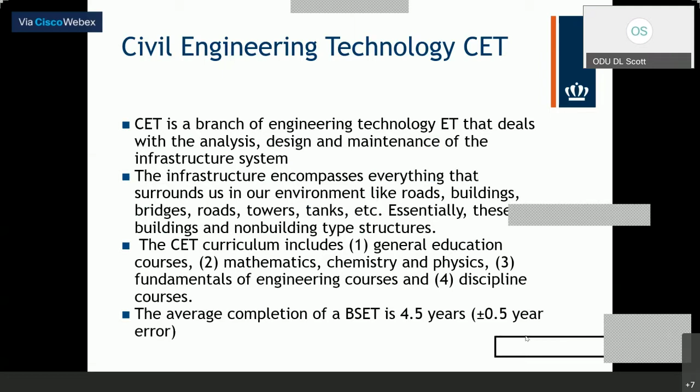Hey Professor, could you—I see some gray boxes over the slide. It looks like you have your WebEx open over the slide. Is there a way to move those? Okay, okay, thank you, thank you.

I think if you listened to the talk last Friday with Professor Lufke, you were able to hear information about what engineering technology is. For those who were not in that talk, I also prepared something similar. Here I'm going to focus specifically on engineering technology, which is an education based on project-based learning.

You are able to work on a project and at the same time start applying some of the principles and fundamentals needed to solve that problem and obtain some form of an outcome. That is a way of learning in a system—not necessarily just doing mathematical studies and solving equations, but developing some sort of a project.

It's a practice-oriented instruction or curriculum. We are very focused on you being able to succeed in practice, so that what you learn here has a very close relationship with the work you will do in a civil engineering office in practice. That's how the entire curriculum is structured.

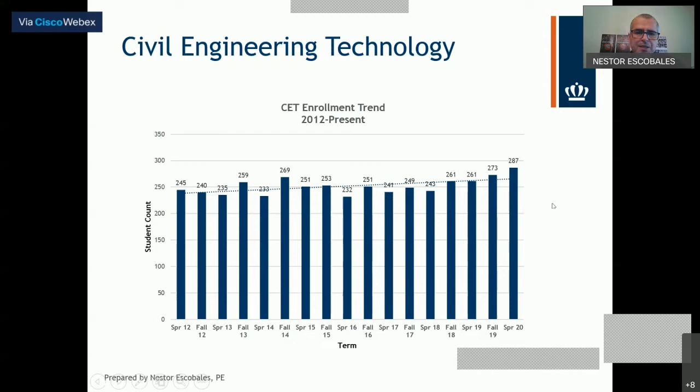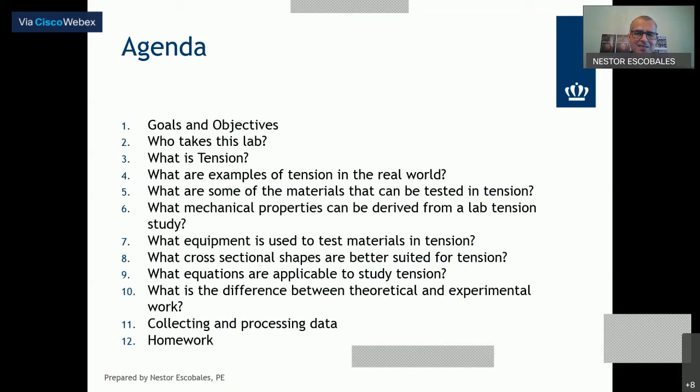At the end of this lab, attendees will be able to understand concepts related to tension of metals, study mechanical properties of metals in tension, and research online. I don't want you to limit your understanding to what is shown here—you can research and expand, looking for other avenues of growth in terms of learning.

So I want you to do research, apply the concepts learned here to collect and process data, and develop a graph that shows the behavior of metals in tension.

When I say develop a graph, we'll be going into the programming aspect, and you can do that in different ways. One simple way is using Excel, which allows you to store and process data depending on the equations you use. When you plot a graph, you can see how the material reacts to the application of load—that's very important for us.

Lastly, we interpret results and derive conclusions. Once we see the graphs, we can start thinking about whether this material may not be the best for the application compared to another material. In the laboratory today we will test three different materials, and you'll see how they behave and which one would be best suited.

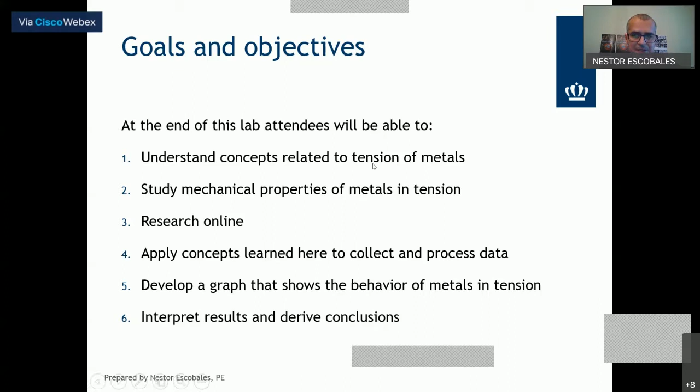So who takes this laboratory? Essentially civil engineering technology students, mechanical engineering technology students—on the science and theoretical side they have what they call a materials laboratory, similar to ours. But this is civil engineering technology oriented, in the engineering technology department. So those are the types of students.

So what is tension? I want you to think about tension from a structural standpoint. You may hear the word tension used when referring to stress—it's somewhat related, but here we want to think about it structurally.

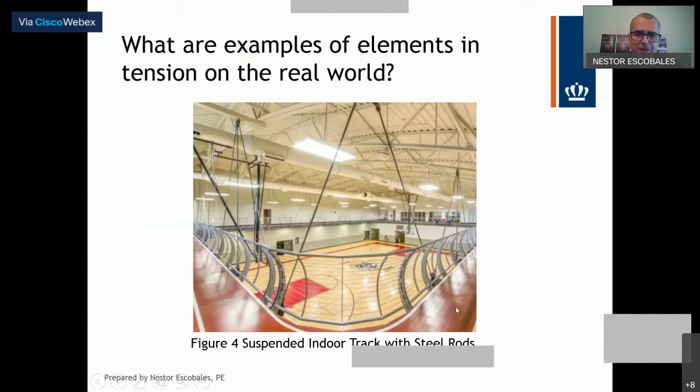So what are examples where we can see tension elements used in the real world? For instance, this is a gymnasium with a basketball court in the center, and there is an indoor suspended track. People run around on that track, completing laps that could be a good 200 meters, perhaps.

Now, the floor beams are attached to the wall, and then they cantilever inwards, and they are held by cables. You see these cables in here? Those are steel rods, and we have several of them around that perimeter. If you look closely, you can see those cables suspended in a pattern. So those are cables in tension, and those are steel rods.

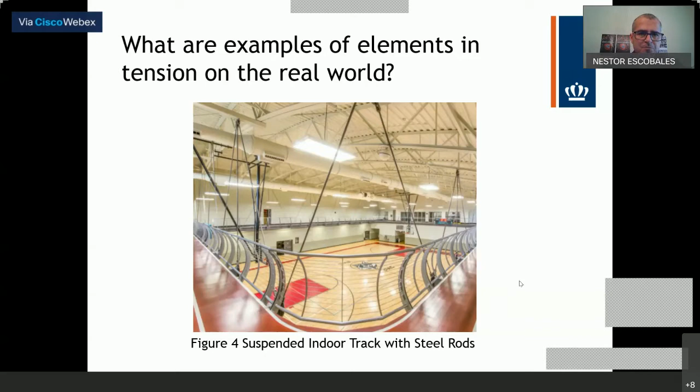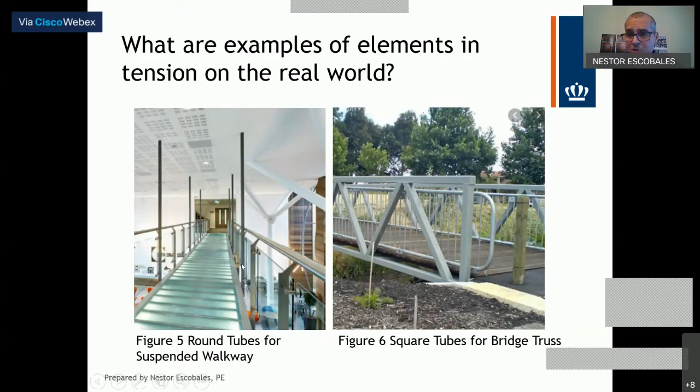So what are some of the materials used for tension type applications? I'm specifically looking at the materials, not the cross-section - I am interested in the materials. So I have alloy steel, aluminum, brass, bronze, carbon steel, cast iron, stainless steel, fiberglass. I can even include plastics. In some cases, that may be the material of choice. It all depends on the application that we may have.

One of the tests that I have today for you is using cast iron. When you plot the graph of stress versus strain, you're going to see how aluminum and carbon steel behave differently versus the cast iron. Those are things that will allow you as an engineer to make decisions as to what choice you may go with in terms of materials. So that is important.

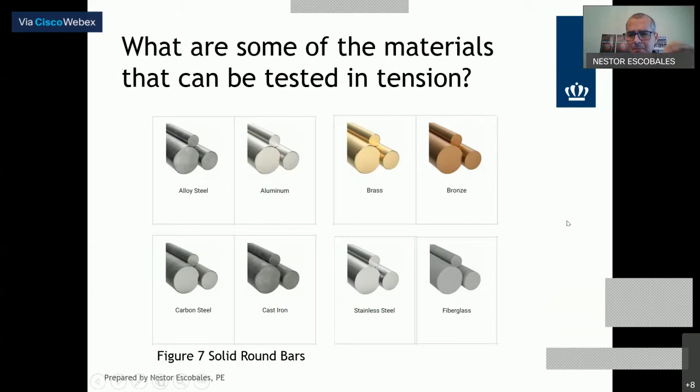What mechanical properties can be derived from a laboratory or lab tension study? So we have the modulus of elasticity, which can be interpreted as the value at which we apply a load, and if we remove it, the material goes back to the original position without any deformation. The modulus of elasticity essentially tells us the extent of that material as far as loading it, and what deformation, how far it can go, such that if I remove that load, it goes back to zero. We can derive that from a stress-strain curve - that's the modulus of elasticity.

Poisson's ratio is a ratio of the lateral deformation divided by the axial deformation, and it essentially allows us to know whether a material is unable to resist any compression or a material that is literally incompressible. Poisson's ratio ranges from 0 to 0.5, being 0 materials that do not resist any type of deformation, and 0.5 materials that are nearly incompressible, where there's no deformation whatsoever.

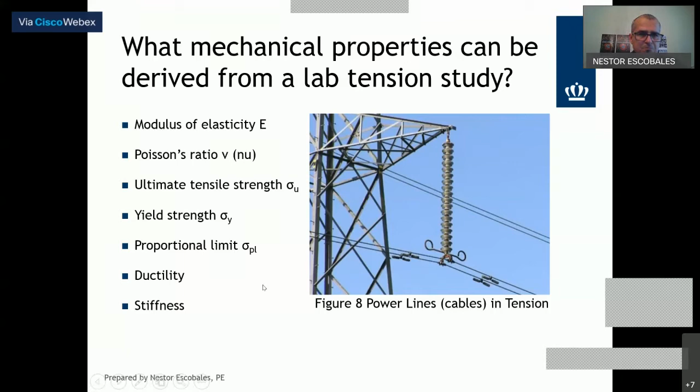What equipment is used to test materials in tension? And here we have Tinius Olsen equipment. Most, if not all, of the equipment in the material testing laboratory has been purchased directly from Tinius Olsen. And these are compact pieces of equipment that are very technically oriented, with a lot of technology attached to them.

These are hydraulics, and we can do tension in this area. We can do compression in this area. This is the controller, which is the system used to operate the equipment. The left side has a middle cross arm, which moves up and down. For tension, specimens are placed between the top and the middle - so this is the tension. For compression, specimens are placed between the base and the middle cross arm, on this platform, the base platform.

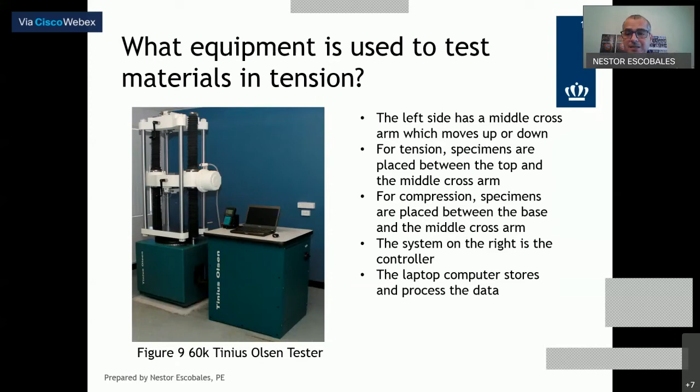The system on the right is the controller, which is essentially led by the computer, the CPU. The laptop computer stores and processes the data. Essentially, in our classes, we collect the data, we give it to the students, and we let the students develop the programs to obtain the graphs and learn what the behavior is.

What cross-sectional shapes are better suited for tension? So now we can talk about the shape, what section type we are using, regardless of the material. Here we have a great variety of cross-sectional elements that can work in tension. The selection is based on the problem at hand. The connection details are very important and shall be studied carefully.

So here we can see angles, we can see bars. This is a hexagon. We've got this would be a rebar, a hollow pipe, hollow tubes, plates of different thicknesses, and in fact you can actually weld two or more of those elements and create a composite section. They can also be made with different other materials.

So I am just showing in here the cross-sectional shape. When I'm talking about the cross-sectional shape, for instance, this is a round bar, this would be a square bar essentially, this is a square hollow tube, a circular pipe, and this is a rectangular plate that will be the cross-section of an angle. So the cross-sectional area is the area that you see at the end.

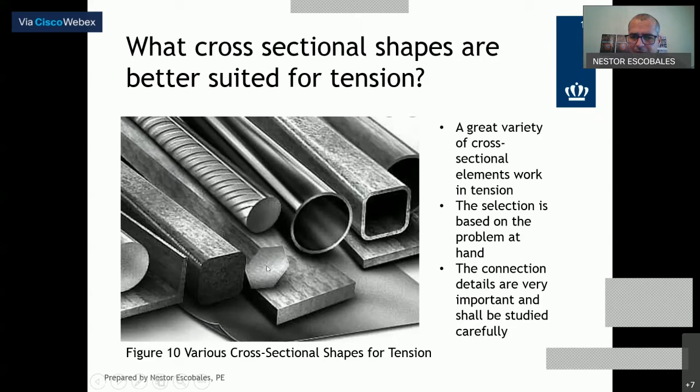So what is the mathematics required to study tension? Again, from the engineering technology standpoint, I'm providing the equations, not necessarily deriving them. In the strength of materials class, which is required for the laboratory, and in our statics class, we derive some of those equations, so you will see that aspect as well. But the importance of instruction lies on the correct use and application of the equations, as opposed to uniquely the derivations.

So we have tensile stress, tensile strain, and that's essentially deformation. Poisson's ratio, nu, that's a Greek letter. Tensile stress, that's in the elastic sense only. Axial deformation, delta. Modulus of elasticity obtained experimentally using the stress-strain curve, and these are values of stress, which is the y-axis of the graph, and values of strain, which is the x-axis of the graph.

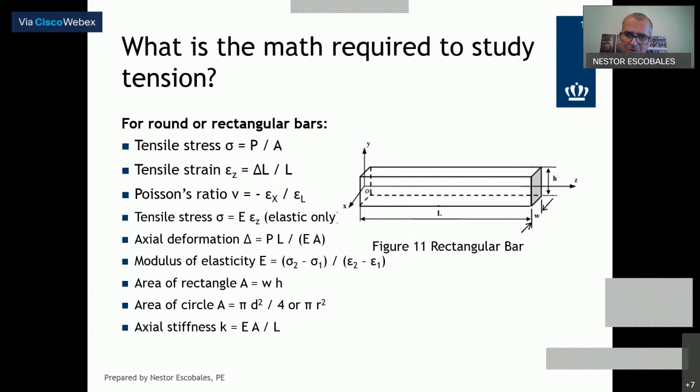The units of axial stiffness are force divided by length. This is a continuation of the equations, and now we can see the variables and the units. It's very important that we attach units to all of our calculations. Diameter in inches, radius of the circle in inches - that's the diameter of a circle, that's the radius. The diameter can also be seen here. Axial stress in pounds per square inch. Axial strain is adimensional, but we write the equations as inch per inch for the units.

Axial deformation, that's the amount that the element is stretched. Modulus of elasticity, E, that's pounds divided by inches squared. The force, T or P, in pounds, length in inches, area in square inches, width, height in inches, axial stiffness, K in pounds per inch, is force divided by length. So those are the different variables and the units associated with each one.

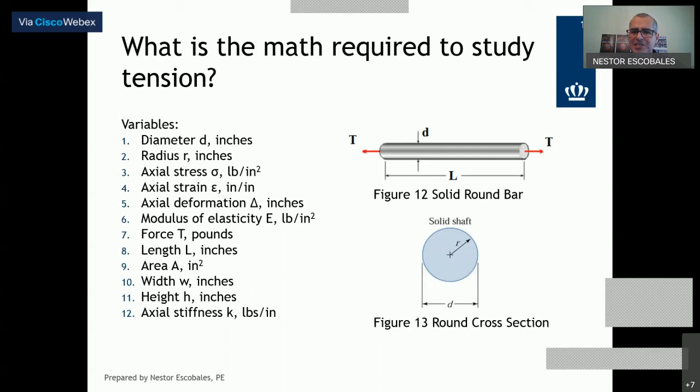So then now the question is, what is the difference between theoretical and experimental work? Theoretical work is pure mathematics - it's essentially the development of math to solve problems. You can do that in your classroom, in the office, at your bedroom desk. We can predict loads and deformations in members based on structural models and theoretical computations. We calculate analytically how much it will twist, what the torsional stress is, what the shear modulus is, what the ductility of the material is. Those are things that can be determined mathematically, theoretically speaking.

Whereas experimental work is in a laboratory setting with equipment. These are actual or specific results from specimens that are tested. Once you're testing something, you're applying a load, you can see how much it's stretching, how much it took before it broke - those are experimental type problems. Here we determine what the magnitude of mechanical properties are from a physical study of the specimen or specimens. Both the experimental and analytical models must be identical in order for things to correlate well. Those are the two types of things that we ask the students to do in our class, in our laboratory. The focus is on the experimental; the students have to do the theoretical and the prediction.

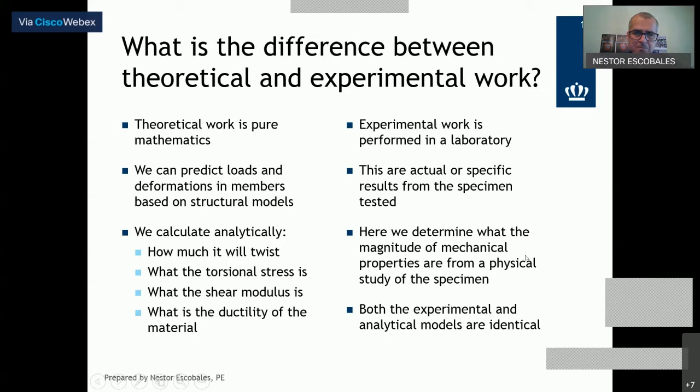So we collect and process data. That's an important aspect in a laboratory and is no different in an online laboratory. When doing experimental work, one of the most important tasks is to collect all appropriate data. That will be essential for you to run calculations. The experiment will give torque loading in pounds or tension force in pounds, angle of twists in degrees, etc. So the experiment will give you data.

The data will be provided at predetermined loading and intervals. So we apply load from 0 to 100 pounds, to 200 pounds, 300 pounds. At each one of those intervals, we record a deformation. That deformation at every interval is important for us to use in the calculations. Collecting this information correctly will be your primary goal. The data collected must be inserted in Excel in two columns: one column for the load, second column for the deformation, and that will be explained at the end.

Additional columns can be inserted to determine other mechanical properties. We call this a spreadsheet.

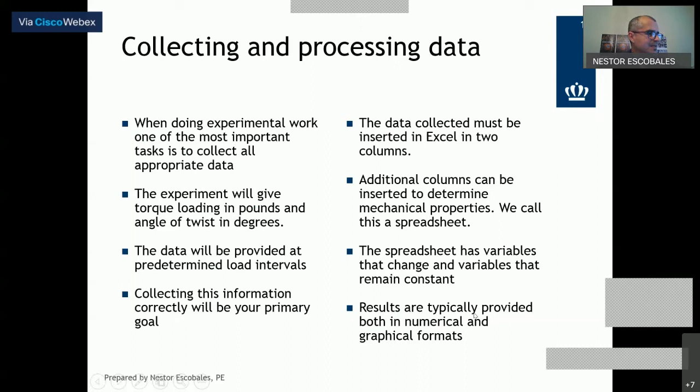Results are typically provided both in numerical and graphical formats. Numerically, it takes some time for you to become acquainted with the results and know whether things are working or not. When you see a graph, you can realize the true behavior of that material, and that is certainly more interesting.

So this is the homework we have today. I want you to reproduce in Excel format what is provided in figure 14. Open Excel and enter all of the information in cells, then add the units and provide the gauge length used. In this case, we're going to use a 2-inch gauge length for the study.

Thickness T of the material, width of the material, area, and then we have the readings. The readings are given to you during the test on Blackboard, which we will visit next. Then you're going to enter the load given in intervals and the elongation associated.

Then you're going to develop an equation in Excel. Enter equal, then develop the strain, and then develop the stress. Those equations are provided a few slides before. Collect the data, enter it in those green shaded portions, and continue down. I only wrote 8 rows here, but there are several more, that's why I wrote 'and so on.' Continue down.

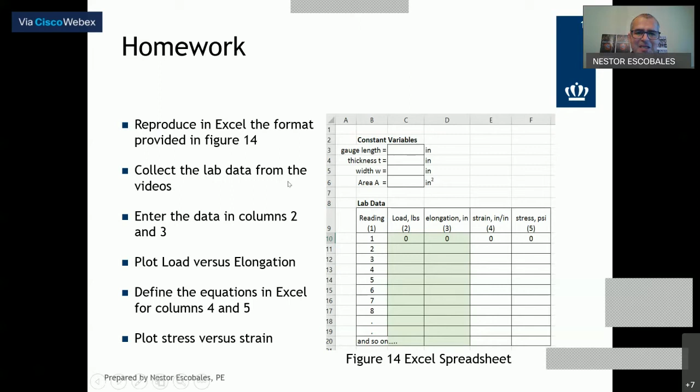Identify the axis well, identify the plots, give a title, add the units, prepare your Excel file, plot the graphs, and send me an email. Let's see who can rise to the challenge. In our class, I give more things to the students. I'm going to give you those two things to see how many people can actually do this problem.

So what to do next? Review the civil engineering technology intro presentation posted on Blackboard. You have access to Blackboard with the link I sent you this past week. Any questions, contact any of the links you saw in there, or contact me directly for any information. Research about Old Dominion University online programs.

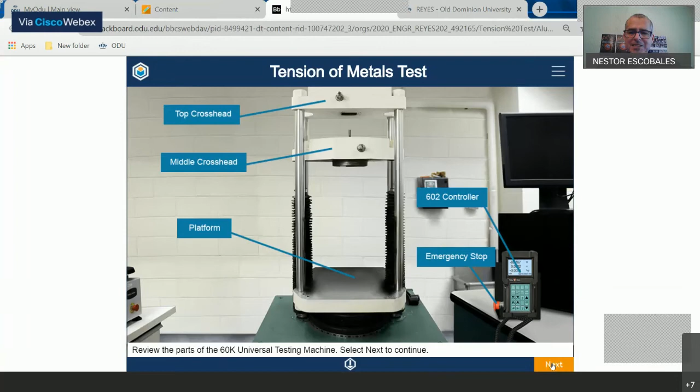What I want you to do is to read the information at the bottom - review the parts of the 60K universal testing machine, select next to continue. So then there is the next. I click on it, and then I go to the next page.

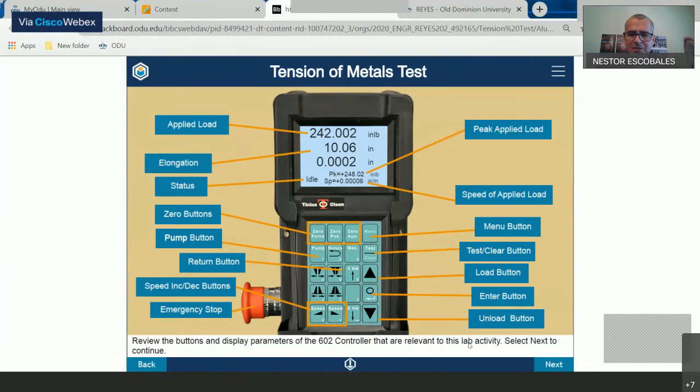I have applied load, elongation - look at all of those in there. So this is essentially a breakdown of the 602 controller. Read always at the bottom - review the buttons and display parameters of the 602 controller that are relevant to this lab. Select next to continue, and so forth.

Review the 3 metal specimens that we are going to test and other components used for this lab. Select the aluminum specimen to continue. So then I move to the first one here at the bottom, cast iron - no. Steel specimen at the middle - no. Aluminum specimen - yes. You can see that the cursor changed from this arrow to a little hand.

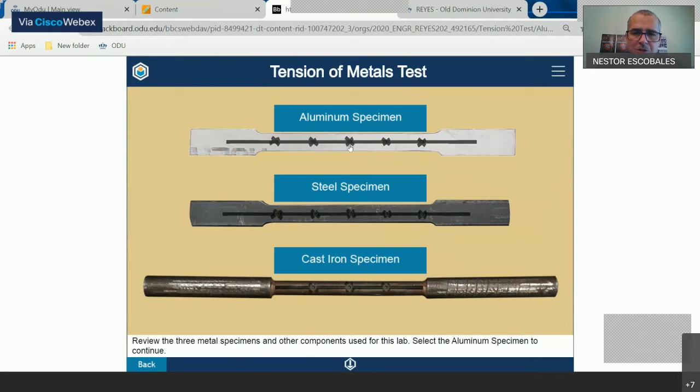So click on it, and now I can see that it has been installed. This little box shows that it is installed, and you can see it there, and it has been punch marked at 1 inch on center, which you will see in the previous activity. Then it says the aluminum specimen has been placed in the 60K universal testing machine. Now the 602 controller needs to be configured for the test. Select the 602 controller to continue.

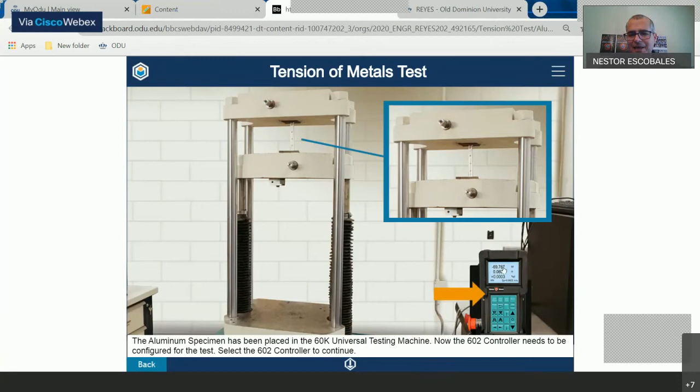So then it tells you to go here, and you see that when I go over it, it goes from the arrow to the little hand, and then I select that. I think I have a question, I believe.

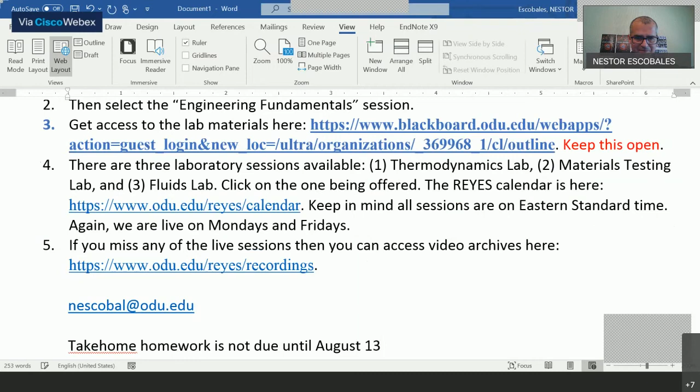Take it home if you want to do it. You are not required, you're welcome to do it, but if you do it, it's not due until the 13th.

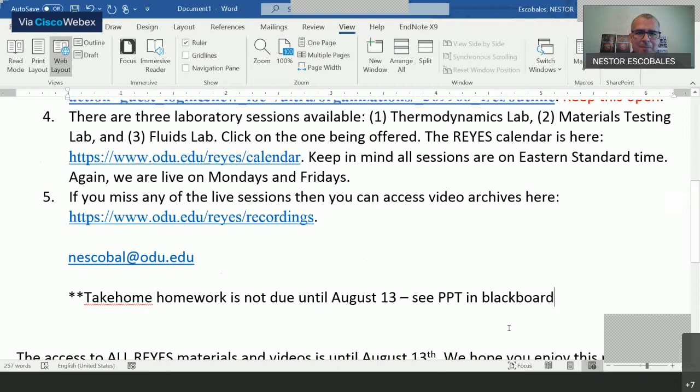For the take-home homework, open the PowerPoint presentation in Blackboard. To access Blackboard, you need this link. You can always go back in the recorded video, copy the link, and access that information.

Let me see if I can remove this line so you can see the underscore clearly. A few more seconds and then I can go back. I'm going to stop sharing here. You can go back in the video, pause it, get the link, and access Blackboard. Then I want to go to Blackboard again and continue where I was.

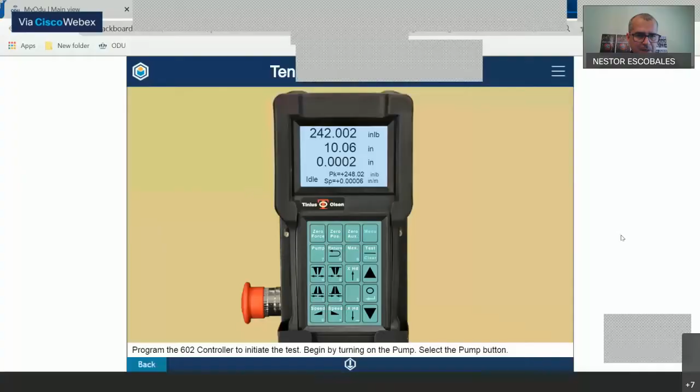Program the 602 controller to initiate the test. I'm reading at the bottom. Begin by turning on the pump. So I go to the pump, click on it, and you hear the pump running. Select the return button, which moves the base of the equipment or platform to its home position, essentially setting things to zero.

It says here: reset the controller display, select 0 force, 0 position, and 0 auxiliary. So I am essentially resetting everything. Select test, and now you see the test appear there.

Now I want to load, which is that triangle. Adjust the load rate to 0.05. Select the increase speed button — this one. You see this is increase speed and this is decrease speed. So now, as I click, I am increasing the speed. Once I reach 0.05, I click next.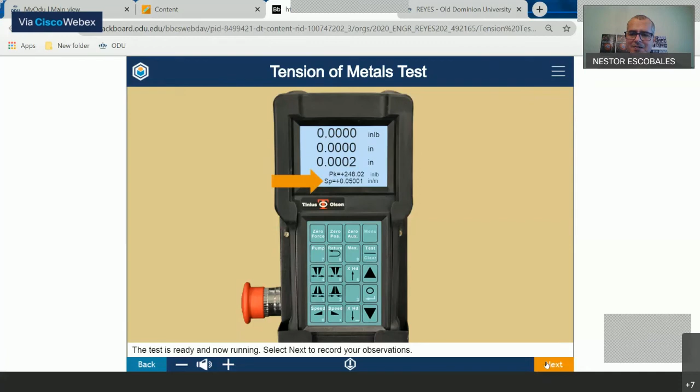Observe and record the first 10 readings of the test. All 10 readings will remain on the screen to review and record before proceeding. Once it reaches 10, it will stop and give you time to write and transfer that information to the Excel file you must construct, based on the format on the second-to-last PowerPoint slide, so you can create the graph and the program.

So now we have 10 readings. I'll click next, and it will continue giving the remaining readings. Now you see it started on 11 — it didn't start on 1. I gave you 1 to 10 before, now 11 to 20. It will continue repeating this process until it reaches 68 readings.

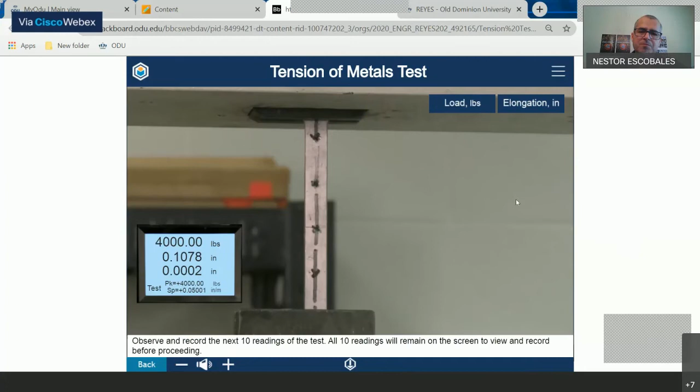If I click next, I'll get the next 10 readings, and so forth, all the way until it fractures. When it fractures and you've collected all the information, you're ready to work on your Excel file. You need the 68 readings for aluminum, and whatever number of readings for steel and cast iron. You'll have 3 graphs, and I want you to plot all 3 on top of each other.

So that will be your task. If you can plot them separate, great. If you can plot them together, better.

Okay, so I'm going to stop here and go back out, just look at any potential questions. Don't have anything in there. Let's go back to Blackboard. Here I'm going to cancel, go back to Blackboard and share.

Okay, so again, when you are in the home page of Blackboard, I want you to click on Material Testing Lab, then click on the tension test. That's where the civil engineering technology PowerPoint presentation is at. You can click on that, download it, and review it. That's about the program, about the university. For today, it's the tension test.

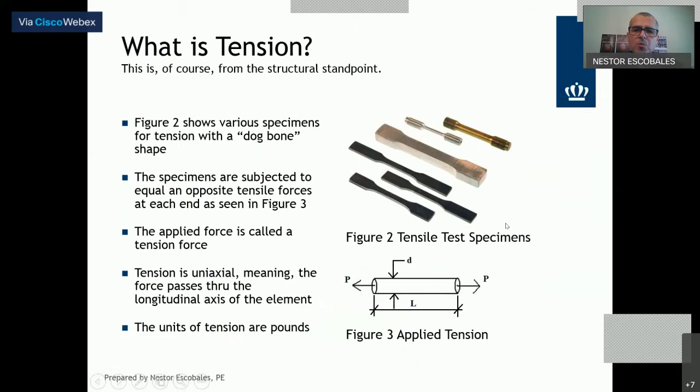If we go into, let me go into the tension presentation, pull up the homework part. Okay, and then go here, go all the way down.

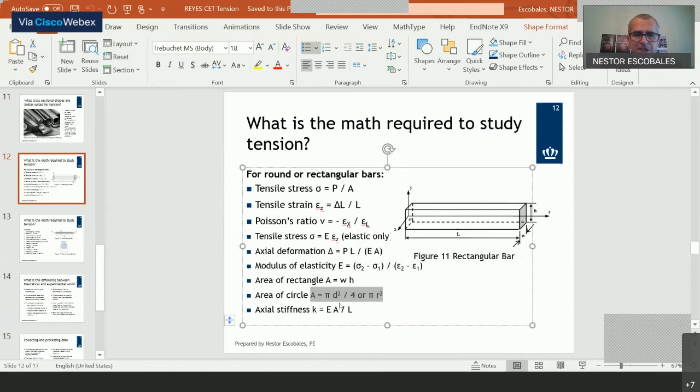So there are your equations, that's the math required. You have rectangular sections and round sections, so you have to set up the area for a circle and the area for a rectangle. Whenever we use area in an equation, if you have the area of a rectangle, you use that equation; if you have the area of a circle, you use either of two equations. And then that's the format for the homework.

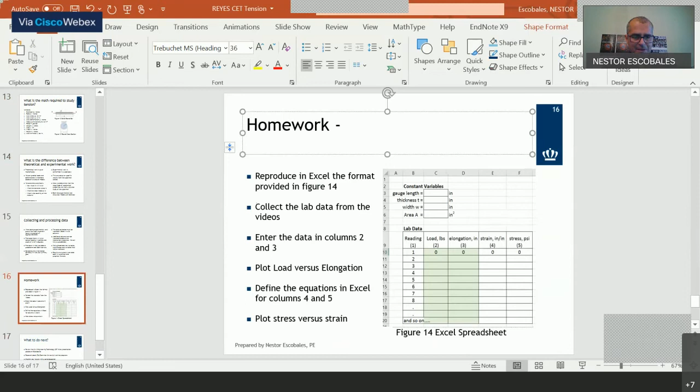Okay, so if you solve the problem, I want you to email me at nscoval@odu.edu with the solution. If you do that, that will be fantastic.

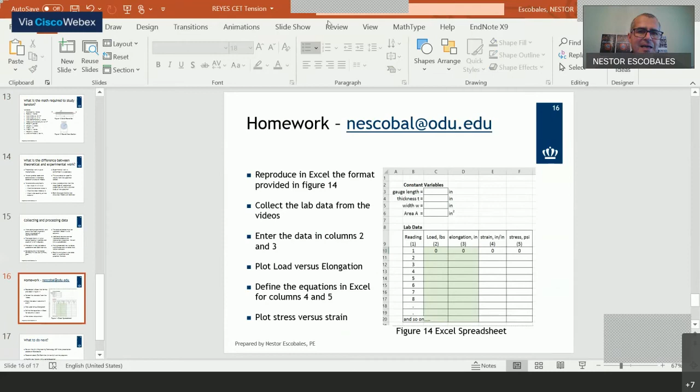So that's essentially everything I have prepared for you today. Unless there are any other questions, I guess we are pretty much done. No questions so far. We are about 20 minutes away from ending our talk.

Okay, I see a question here from Arnold Zhu from Indonesia: what do you mean, plot them separately and plot them together?

Well, for instance, I will have to write something. Let me see if I can do something here. Okay, so I'll open something to show.

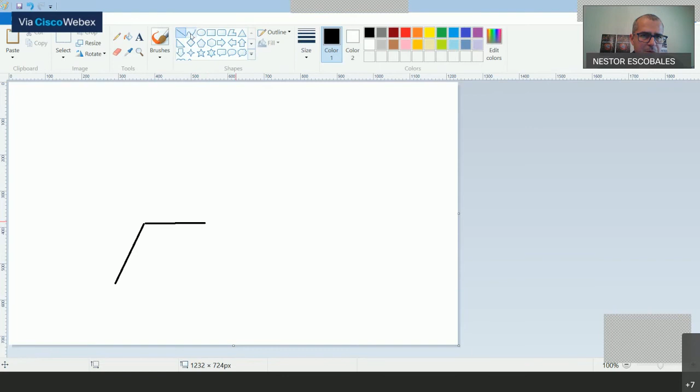If I have a graph that looks like this, and then it goes this way, and then like that—this is a little exaggerated—this is my y-axis. I'm really just drawing this, not plotting from Excel. Let's say that's one plot: here my y-axis is the stress, and this is my x-axis, which is the strain.

Let's say I have a second graph that looks like that. So if I can plot the two together, and let's say my third graph looks like this, a straight line, something like that, I can plot all three graphs on the same x-y graph. Remember, this is my stress and this is my strain. I plotted three different materials in one graph.

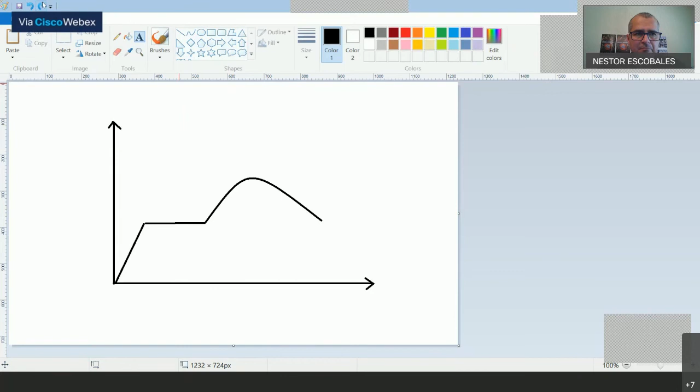Or I can independently plot each one. So I can say, no, I'm going to plot each one separately—that one first, that one separate, that one separate. So that's essentially what I mean by plotting things separately or all together.

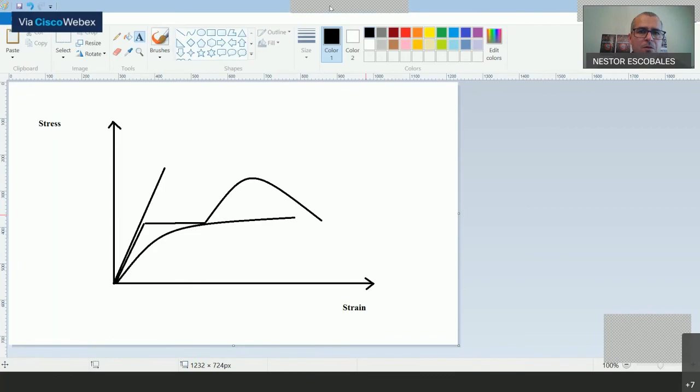Jesus Alberto Perez Vargas from Mexicali, Baja California, in Mexico. Great. The monarchs. Let me see, let me see, I'm reading in there.